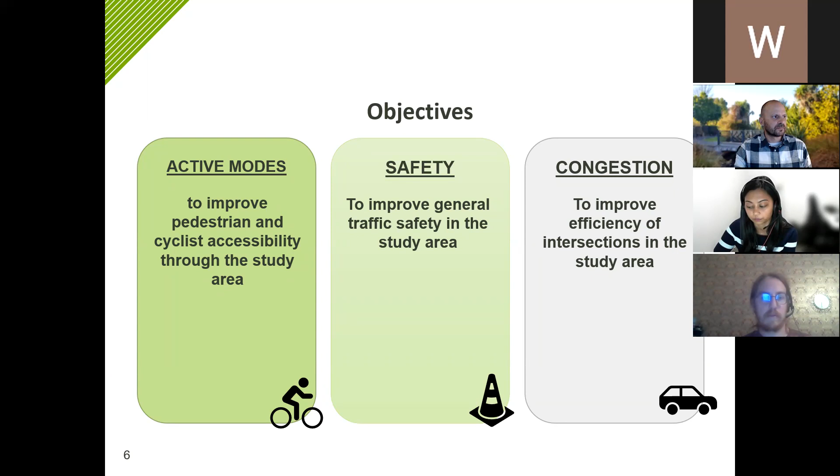We used the feedback from the survey as a foundation for forming the objectives of this project: to improve accessibility for active modes, improve safety for traffic in the area, and improve efficiency at intersections in the study area. There were a lot of other comments that came through too, which we've recorded and are aware of, but that's rolled up into these high level objectives.

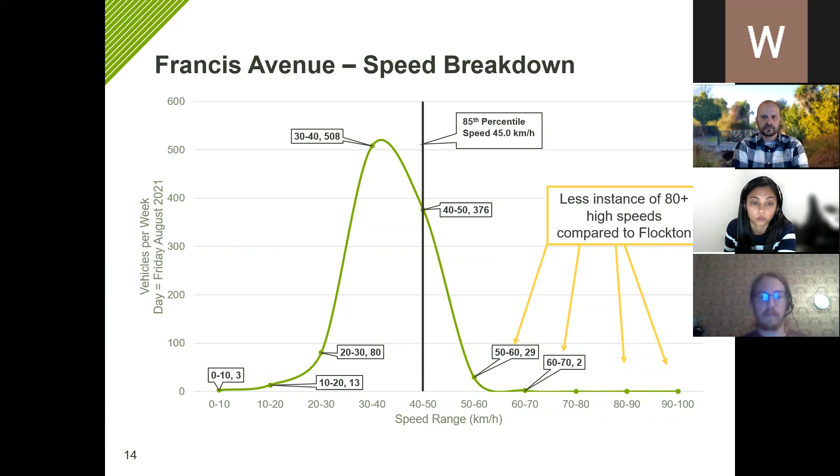So that may be cutting off some of those higher speeds. We've brought this in to introduce what traffic calming may potentially do down Flockton, which we'll speak to later in the presentation. I'll hand over to Mitchell, who will speak to some of the function classifications for Flockton Street, and then we'll go to questions afterwards.

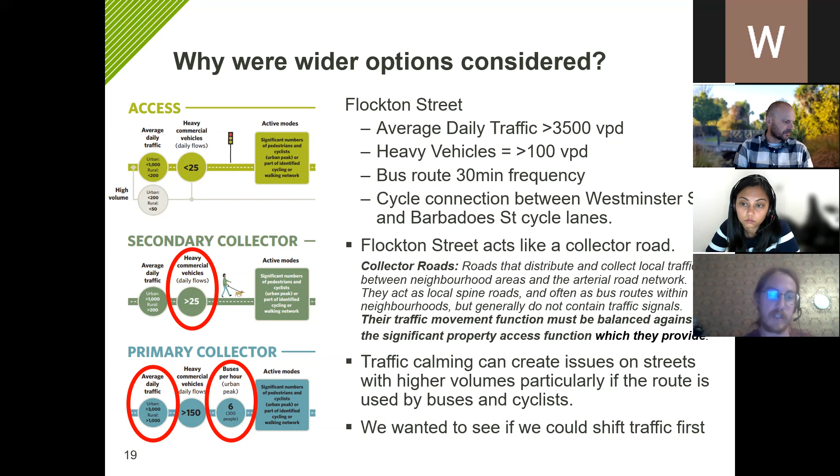So you want to jump into the next slide, Chanel.

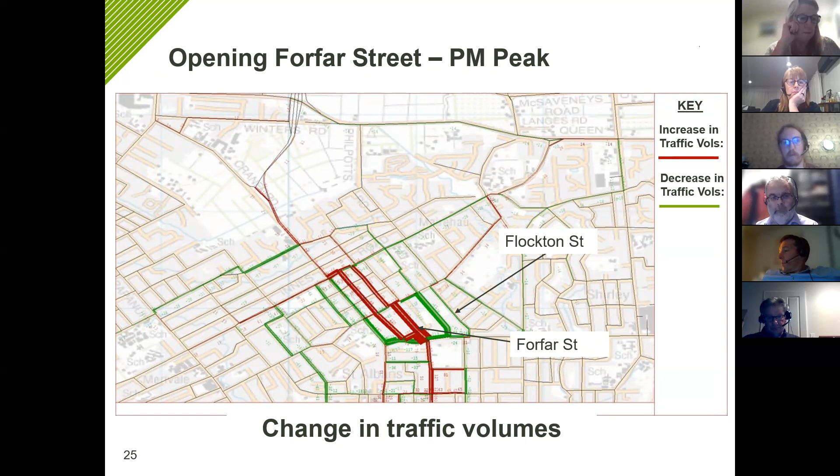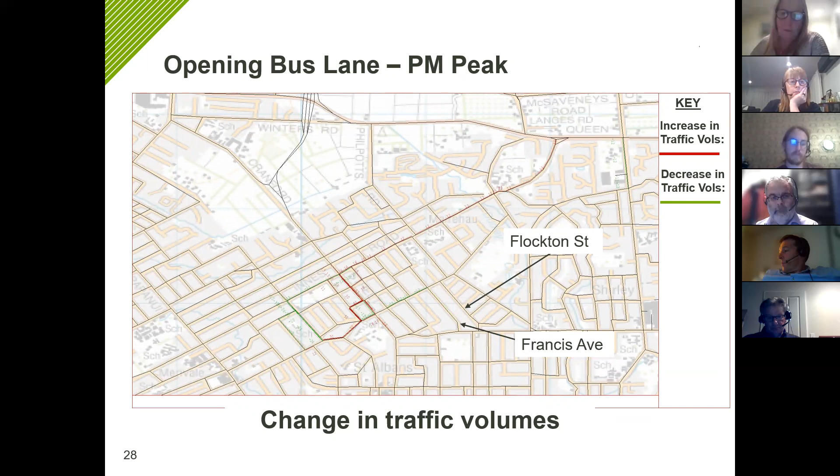So this is just an example of, hopefully this is - does it play? I don't think so. Yeah, I don't think it's working.

Well, I'll talk you through that. What we find is we can send it through later, but we find there's quite a bit of traffic that does build up. We see that happen, and then it can take a while to get out if you're at the end of that queue. That could take some time, but then once that starts moving, the queue clears quite rapidly. So on average, you're turning less than 30 seconds waiting, but for the worst case scenario, if you've joined the back of the queue, it might be up to a minute.

You can also see that sometimes you turn right and then there's a queue of people trying to turn left into Barbadoes, so sometimes that gets filled up and they can't turn out of there as well. But apologies on that video.

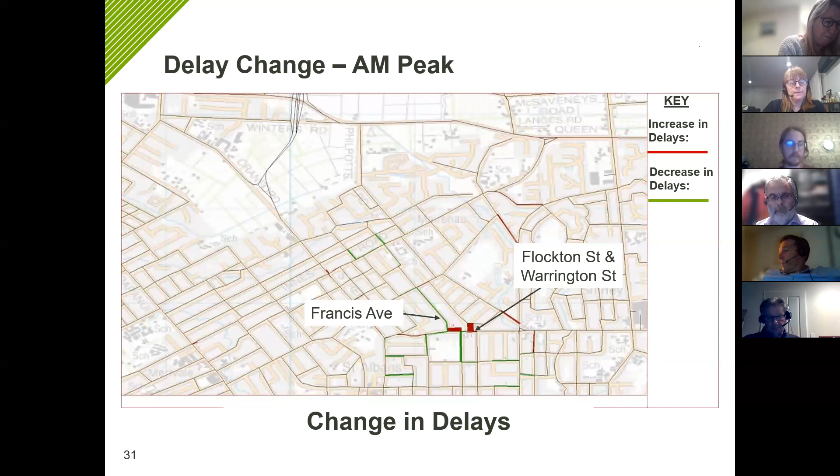So that's a discussion point we can have later. There is an option where it won't improve the delay in getting out of there, but users might find it easier to get out and safer to get out. So I guess it's an option on the table for you as a community to decide whether that works for you or not. And that's similar in the PM peak.

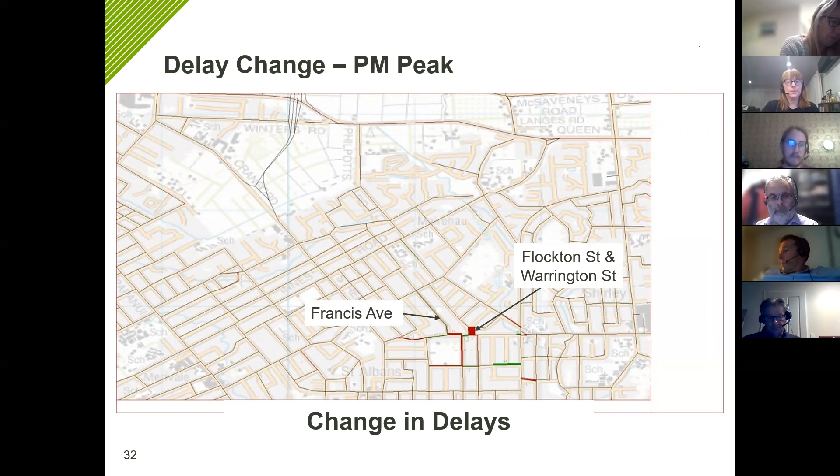What that will do is introduce more delays on Warrington Street as well. So whether it achieves anything useful for you is something we can discuss. So on the next slide, we've just got a summary of where we've landed on that traffic analysis.

As mentioned earlier, the idea here was seeing if there were options that would attract traffic such that it would reduce traffic volumes on Flockton Street. As we discussed earlier, Flockton Street is acting like a collector road. We're not saying that's wrong or right, but that is the nature of how it's operating at the moment. None of those wider network improvements will reduce the Flockton Street traffic volumes.

Opening Forfar Street creates significant issues on Forfar and the wider network, and doesn't show that it will have significant reductions on Flockton anyway. The signalisation of Flockton Warrington will not address the congestion objective, but it could improve the ease of movement and safety for all modes.

And just reiterating that this is a bus route through there, so we have talked to ECAN. There's no intention to move the buses from that route, so that's something we have to work through in terms of design considerations.

So once we've come to the end of that, given there's not much left in the toolbox to necessarily reduce volumes, then we take a further look at traffic calming that will fit within that environment and the volumes that we're looking at.

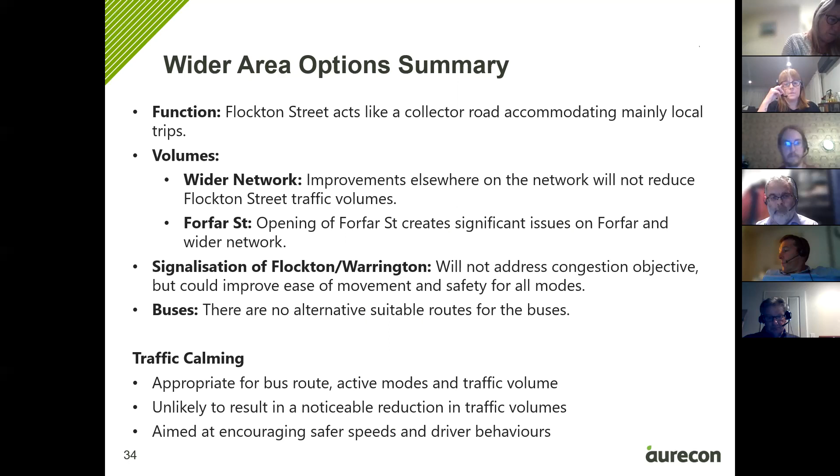But we'll pause there for questions, because I anticipate there's a few there.

Yeah, great. Yeah, thanks for that. I guess for me, the questions that I've got are around the modelling, I suppose.

The Forfar impact, I suppose, and I guess that street was closed without consultation or trial. And I suppose my concerns are it's funneled traffic into two streets, and as we're focusing on Flockton tonight, the impact on Francis has actually had more than

percentage-wise than what Flockton's had. But for me, it's funneled traffic into two streets that aren't really designed as what you describe as collectors. Whereas Forfar was originally designed as a feeder road off the main one-way system into what has now become a motorway. So I guess I would challenge the data for a start, because it was measured off when Forfar was closed. And what does the data look like pre the CNC opening when Forfar was open?

Is there any actual impact to the overall, what was happening with that system? And I suppose that's a question that potentially you could argue is neither here nor there, but more importantly, is there a way to funnel the traffic so that it doesn't impact your Mersey, Severns, and the ones where I guess there was some legitimate concern that we don't want to cause a problem through there.

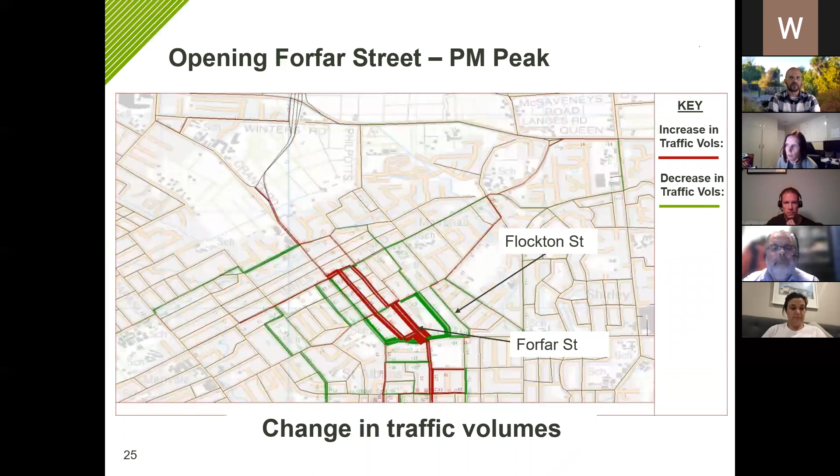It is creating a function for those trips in the area to collect from the area and head into town where they desire to go. So I think when we're thinking of measures to change people's behaviours, they're only effective if it's going to interrupt where they want to head. Otherwise, yeah, just something to keep in mind.

Or maybe we could. Oh, yep, Shane. Yes, oh, I was just going to suggest maybe we go to the next section.

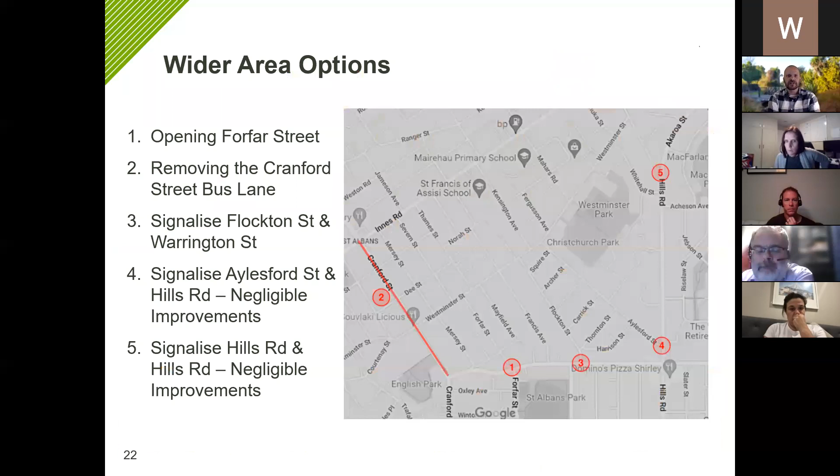I should have said this at the start - this is not a decision-making meeting, this is information sharing. We want to share what the council's got, but hear what we can from residents as well. There will be decision-making processes to follow this, but nothing we discuss or don't discuss tonight is going to set anything in stone.

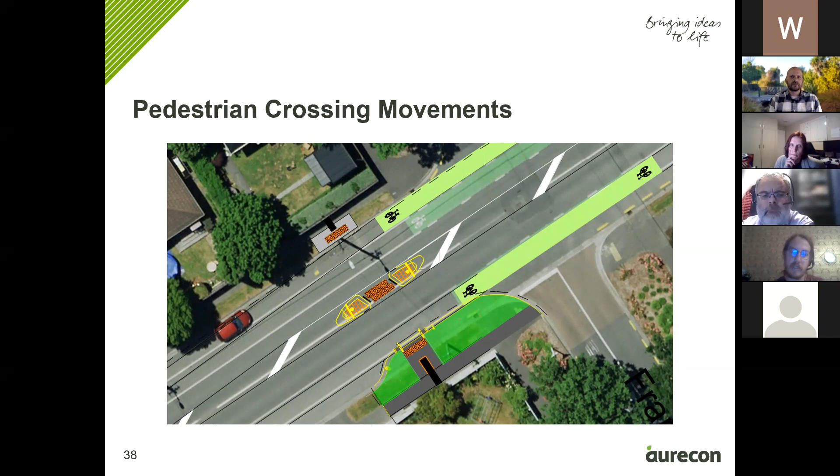That's showing what that looks like with some curb build-outs to minimize the crossing distance. We also looked at a couple of options for slowing speeds down into Flockton. One option would be a paved threshold similar to the Francis Street intersection, and another is a speed hump similar to Aylesford Street intersection. Given it's a bus route, there's limited things we can do to change the curb geometry to tighten corners, because we've got to allow for those tracking curves - same with the pedestrian refuge islands, you need space to accommodate those. So we'll have to rule those options out, but these are two potential simple things that could slow speeds entering Flockton Street.

Mitchell, just quickly on that - already with the heavy buses, I live on that corner, and the back wheel comes up on the curb and it totally shakes my house. So that would be something to consider - already the buses are struggling to get around there.

I think it's significant for you to note, Mitchell, that the three residents in the room are Ange, who's on the corner, me, who lives next door, and Dave, who lives next door to me, because it's this corner where people speed around, and it's incredibly difficult for us to get out of our driveways. I've got two young kids in my car, and the amount of near misses I've had because of the speed - but there's also the issue of the heavy buses now. It feels like an earthquake's about to start every time a bus comes around, every 30 minutes. It's horrible.

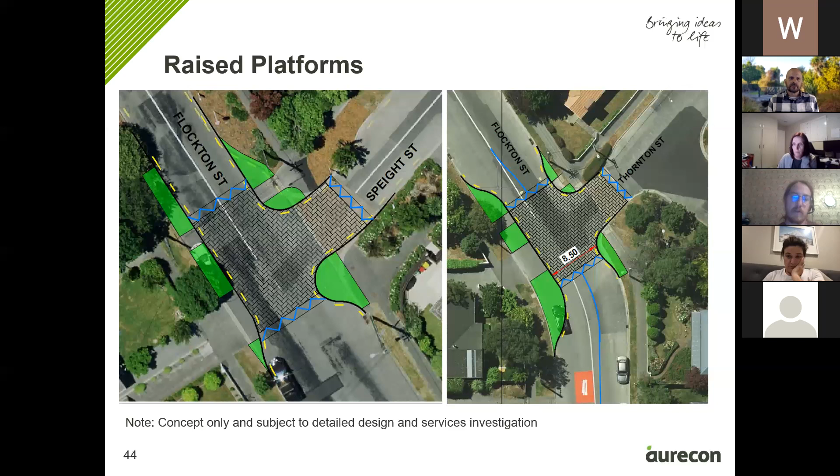I talked about a lot of this when we talked about raised platforms, but in terms of speeds, chicanes are effective at reducing speeds at peak times when you've got more traffic on the street, because you've got more opposing movements. But at off-peak times, unless you've got some kind of vertical element, you can still get those really high-end speeds on the street. In terms of traffic flow, the frequency and severity of the chicanes can have quite a significant impact on congestion. At 3,500 vehicles per day, you're starting to get to those volumes where you really notice those opposing conflicts, and you almost feel like you're fighting your way down the street at those peak times.

Like I say, the traffic volumes are generally higher on Flockton Street than other streets where we'd normally use chicanes. Noise - there is an element of noise to these as well, because every time you've got a vehicle slowing down to a stop to give way, you've got that acceleration and deceleration, which is generating noise as well.

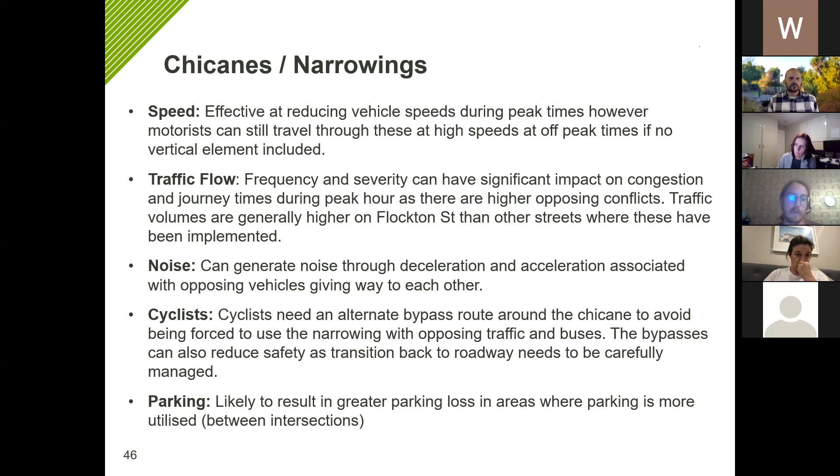These also take up quite a bit of longitudinal space, so they do result in more parking loss, and that would be between intersections as well, where people probably want the parking more so than at the intersections. So that's something just to bear in mind as well.

So on the screen we're just showing where you could introduce two chicanes. I would be a bit nervous about implementing sort of five chicanes down the street at 100-meter intervals, because I do think that would make that street feel really congested, and you wouldn't be interested in introducing a lot of conflicts at peak hour times. But there is potential, I guess, as we're talking about these two options, to look at mixing and matching as well - like you might do some raised platforms at intersections in conjunction with some chicanes. There are those options we can consider.

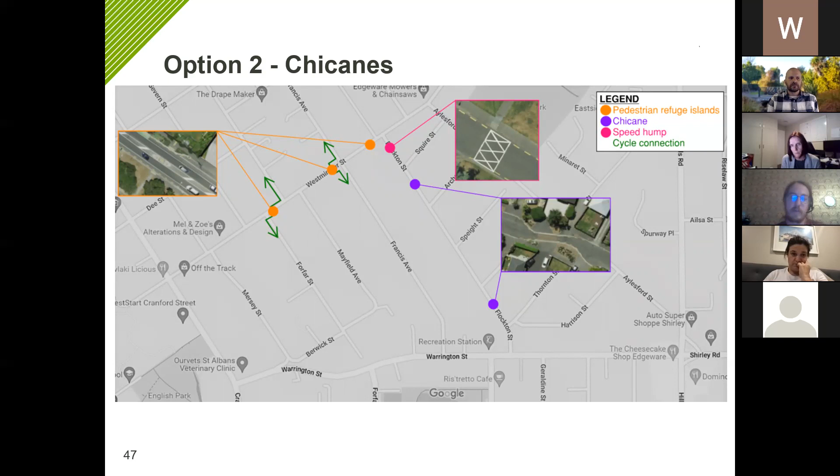Speed humps and speed cushions - we did include these as they're probably the most effective at reducing speeds. The speed cushions are probably less effective at reducing speeds than the speed humps, but they do have advantages in that the buses can get through them and cyclists can get through them a bit easier.

We're very aware that they have been in there before and haven't worked, but just wanted to put it all out in front of you, that it's been looked at, I guess. So I'll just quickly go through this.

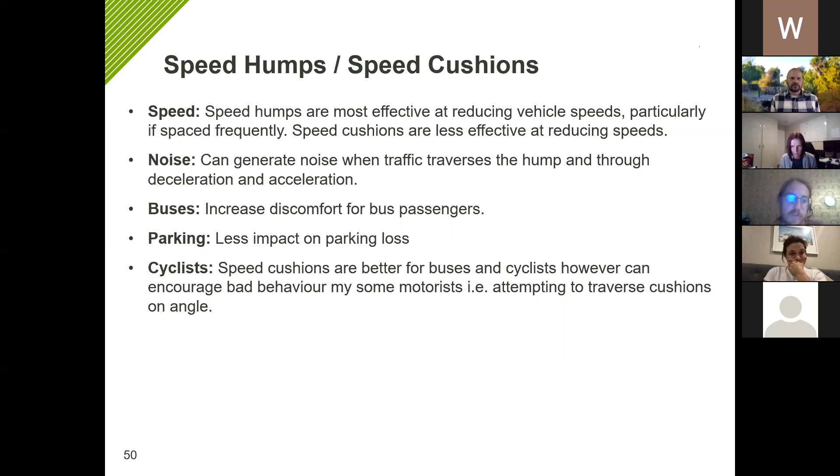So they are more effective at reducing speeds. They probably create more noise, more discomfort for bus passengers, less impact on parking loss, and probably less impact on cyclists. Obviously the speed cushions, where cyclists can ride through them, are better.

Next slide - and again we'd look at a similar spacing for those.

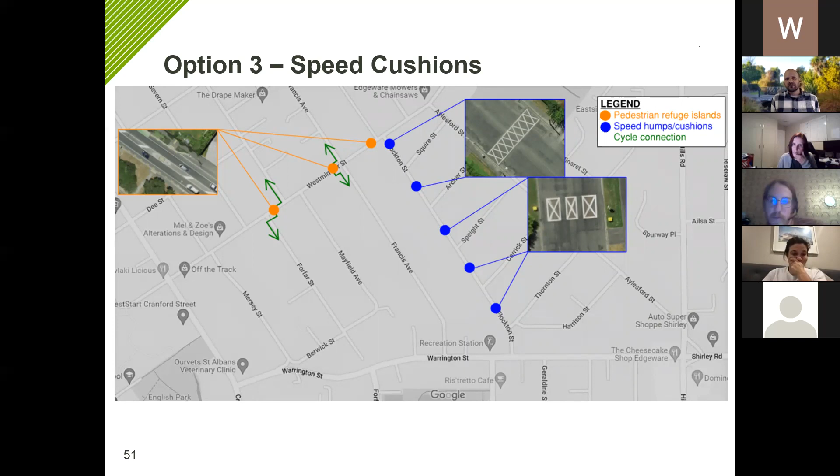So raised platforms - they can be integrated with curb build-outs and increased landscaping, which will break up that forward visibility of the road, which will encourage better driver behaviour. And then that would also increase safety at intersections and give us opportunities to create safer pedestrian crossing points.

The risk is that it may not have a dramatic impact on reducing speeds, given that the bumps are often not that aggressive, but that visual element would go a long way to reducing speeds, and they'll reduce those higher-end speeds. So they're probably more suited to a road with higher traffic volumes and buses and cyclists, like Flockton.

Chicanes, unless you installed them at quite frequent intervals, I think they'd have limited impact. And if you installed them at those really frequent intervals, they would make that street feel really congested and introduce a lot of opposing conflicts and result in a lot of parking loss. And without the vertical element, they might not reduce those higher end speeds, especially at off-peak times. We did think about the possibility of trialing some of those options and just see how they go if there was a preference to try some chicanes.

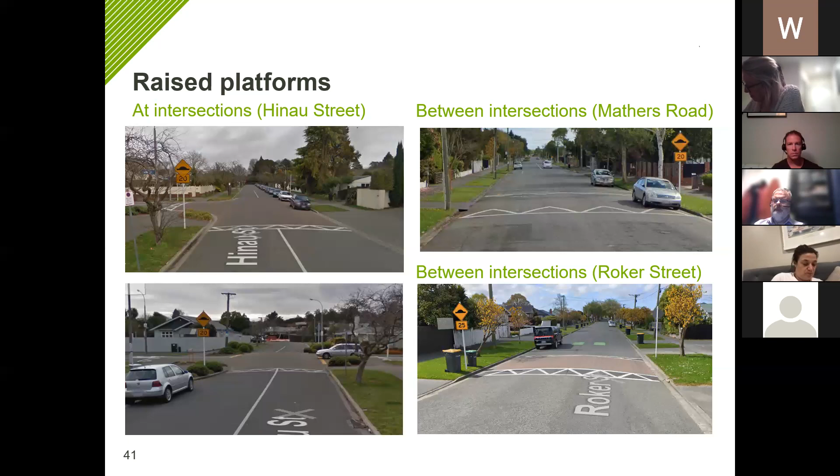What are your thoughts on the chicanes compared to these platforms? There were some questions about this - the chicanes are the sort of one-way narrowings. I think do that down the whole entire street, so we look like that street in San Francisco that goes like this. That's what I think. How about Joe?

Something I should have pointed out too on these plans - I've shown a little speed platform in the chicane as well, which is quite often what we do to just slow down those higher end speeds. But it's an option.

I'd like to thank all the work that's gone into this. It's really quite clear now. I suppose we were all coming at it from different angles trying to come up with solutions, and it's obviously a really tough problem. A couple of things that have been presented are around speed and safety - calming on a road with 3,000 plus vehicles on it is hard to do. So whatever we do is not going to work that well. That's what I've taken out of this.

So I guess we're back to the earlier sections of how do we reduce the traffic down the street, and that's not really the time to take it. I'll just put - I don't think it won't work that well in terms of traffic calming.

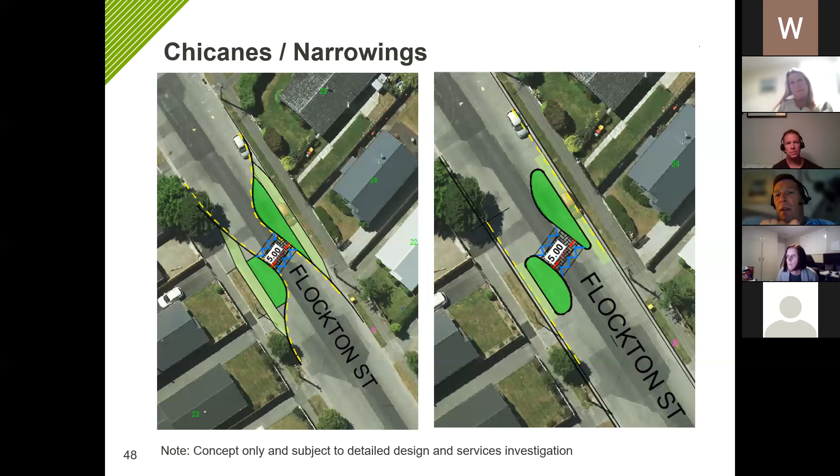Thanks, I'm not too sure if it's been touched on - have we looked at the top of the street where Flockton meets Westminster, actually narrowing the entrance to it so cars can't go around into it fast?

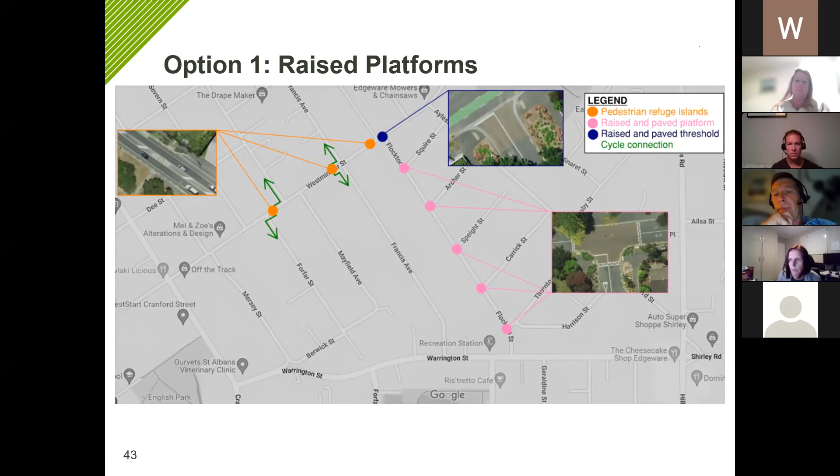Yeah, that was one of the first ones we came back to. The problem we've got there is when the bus turns into there. So there were two options on slide 39, Chanel. It's already narrowed a bit anyway - it's got that built out garden already, hasn't it? So I guess there's only so much narrowing we can do.

Yeah, because already the back wheels of the bus are coming up over the curb when they try to turn. And when it's busy, they actually have to stop, because if there are cars turning from Flockton into Westminster, the bus can't get around. During peak times, the buses are quite often stationary waiting for cars to turn onto Westminster from Flockton.

Then the other thing is, if we look to trial something to see if chicanes would be the easier thing to trial. Yeah, you can trial a horizontal deflection reasonably easy. The vertical one's a bit harder to trial.

The other thing I was thinking, is the vibration particularly bad at that top end, or could we look at the pavement and potentially it's not the whole street, but there's something right at that top end where they're coming from that we could look at fixing, in that area there that's particularly bad. Hope I'm not talking out of line here, but that could be something if there's an isolated bit that's particularly vibrating. Do you have an understanding, Joe or Angela?

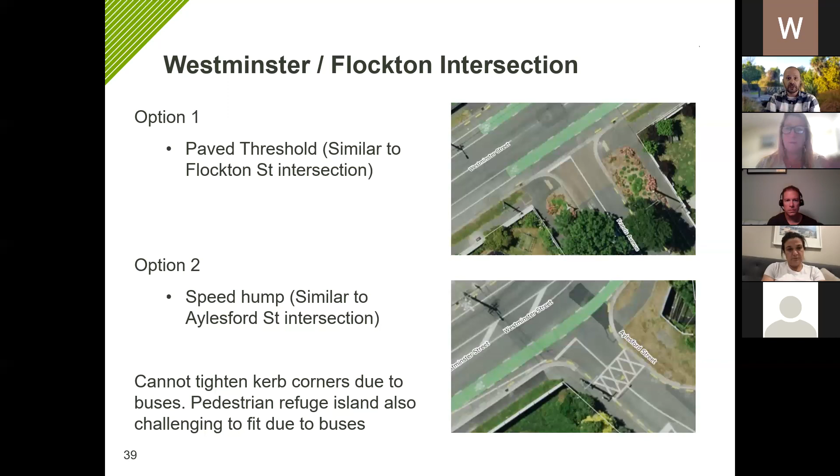I just want to check what we need to do to close this and what's next, both from the point of view of the residents online and also from staff. The only thing I want to... I'm hearing half of somebody there. Sorry, has been...

I'm a little frustrated to hear... Sorry? Oh, Joe, you're cutting out. Yeah? Yep. Oh, can you hear me now? Cool, yep, got you now. Yep, you've been... so the issue... cool, sorry, I just got to.

So I am a little frustrated to constantly hear that our options for traffic calming are limited because we are a street with over 3,000 vehicle movements a day. Prior to the CNC opening, we had 2,000. So we have 3,000 now as a direct result of the CNC.

When you went out and consulted, it was with a promise that Flockton Street would have significant traffic calming. That hasn't happened. And now, partly because of the decision to close Forfar Street and not look at any alternative, which had 4,000, our traffic's increased, and now you've become a connector or collector road. So your options are limited. I appreciate this is a tough problem to solve, but part of the problem is being created for us because of the decisions made around the CNC. And the modelling never showed, pre-CNC, that the impact on Flockton Street would be as great as it is. So that makes me question how effective and how much trust we can place in the modelling presented tonight.